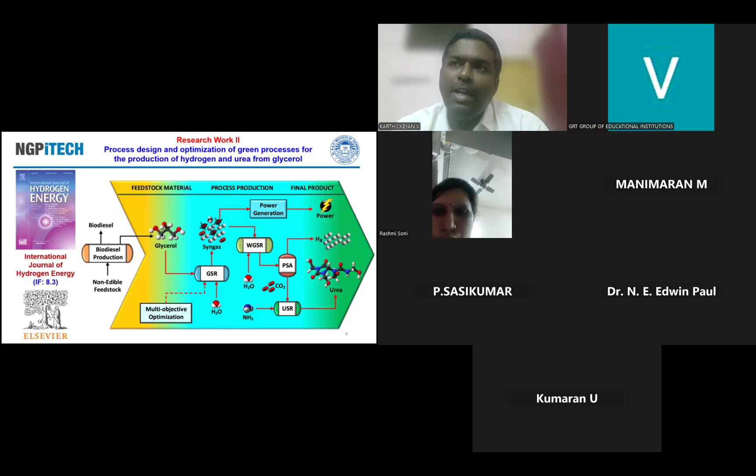In the case of biodiesel, that can be taken for direct application in engines. But glycerol is purely considered a waste material, or it consists of a high amount of fatty content that can be considered for soap manufacturing. This research work gives information about how that waste can be converted into hydrogen.

In this case, we consider the glycerol raw material and do the glycerol steam reformation over here. We consider the water in this GSR and produce the syngas, but the syngas is considered a raw syngas which cannot be in purified form.

For the purification process, we are considering the water gas shift reactor. If we consider this, we can separate the hydrogen and carbon dioxide. Then, considering PSA, which represents pressure swing adsorption method, we can extract the purest form of hydrogen, and the remaining is considered a combination of urea content source. So we consider the urea synthesis process and produce the urea over here.

The syngas can be taken for power generation and we are able to create energy from this method. So in this case, glycerol can be converted into different forms, but in the research we considered different types of scenario-based analysis, life cycle assessments and techno-economic analysis to select which scenario is best for real-time application. This research work is published in the International Journal of Hydrogen Energy.

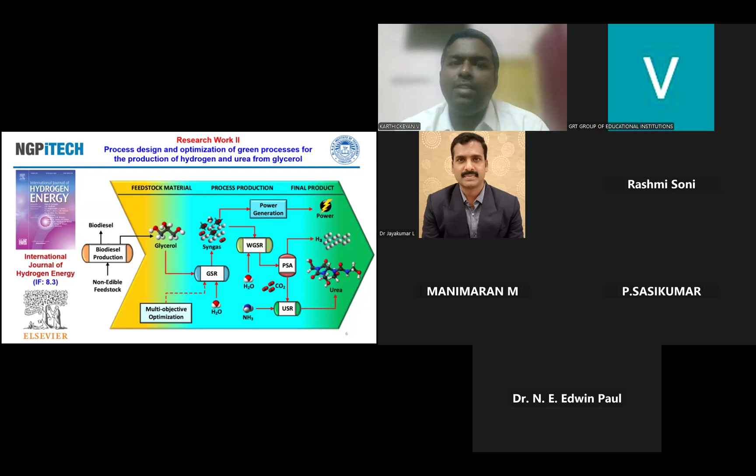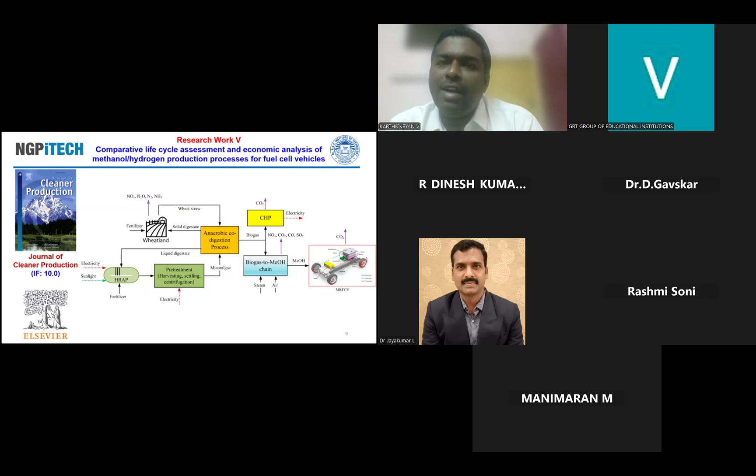Based on this, which approach is prominent for a fuel cell vehicle to get the maximum amount of hydrogen for its utilization is explored in this research work, published in the Journal of Cleaner Production. These 5 works give an outline for this presentation: how hydrogen can be produced, and how it can be implemented for engine, fuel cell, or combined heat and power applications. This gives an in-depth outline of the entire presentation.

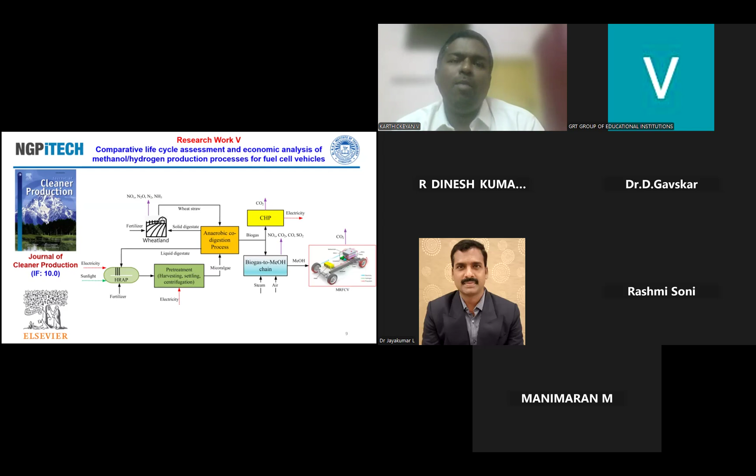First we will discuss the background of hydrogen, that is blue, green and gray hydrogen. The basis of why we require hydrogen is the depletion of fossil fuel as a major factor. Another important parameter is the increase in fuel cost. Another is the greenhouse gas effect, meaning environmental emission plays a vital role, which pollutes the environment and degrades natural resources.

In general, carbon emission for energy is nearly 73.2%. For producing energy, we give carbon emission of nearly 100, with only 26 or 27 percent of energy extraction. We are giving 72 to 73 percent of energy to the environment. If it increases, like how our capital Delhi faces, other states and districts may also face a similar condition. So this plays a vital role.

In the case of transportation alone, 16.2% of the carbon emission from energy production is considered. But if we go for either electric or hydrogen-based operation, we are able to reduce it to a certain level. Hydrogen is considered an important factor because we have shifted from IC engines to electric. From electric, the next version we can expect is fuel cell vehicles.

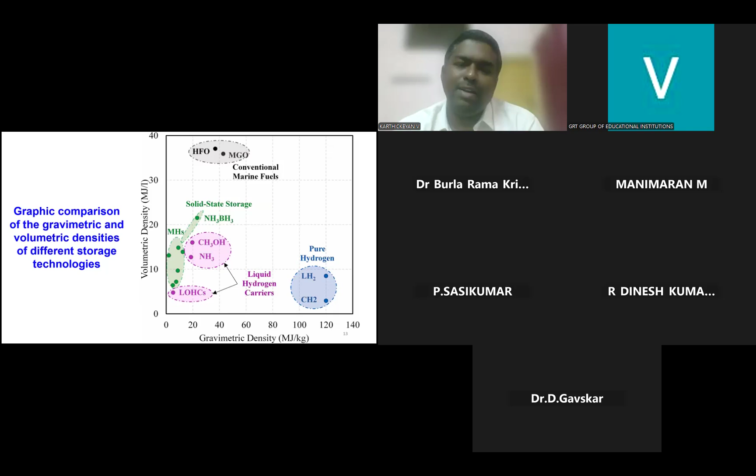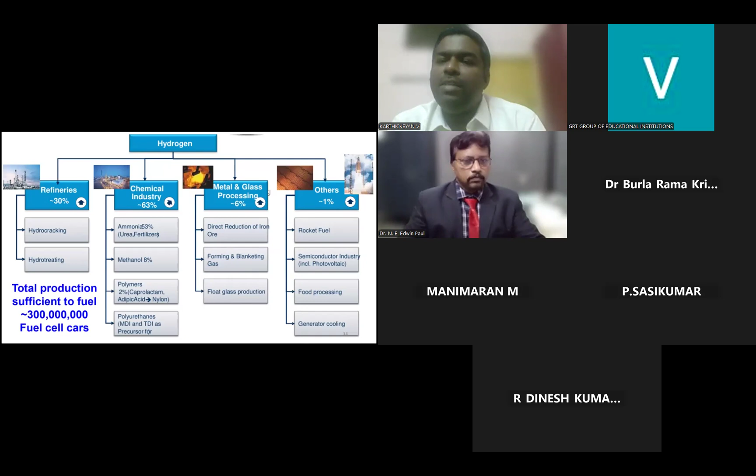In the case of hydrogen, it is used 30% in refineries, 63% in chemical industries, 6% in metal and glass processing, and 1% in other conditions. So overall, the requirement of hydrogen is very high. The production methods are available. The only deficiency is with storing and transportation.

In the case of production methods, I wish to give an overview of the processes available for production, then storage and transportation. Hydrogen can be produced from starch and sugar crops as a source, or water by means of electrolysis, or glycerol by water steam reforming. As I mentioned earlier, natural gas is considered an important source for hydrogen production.

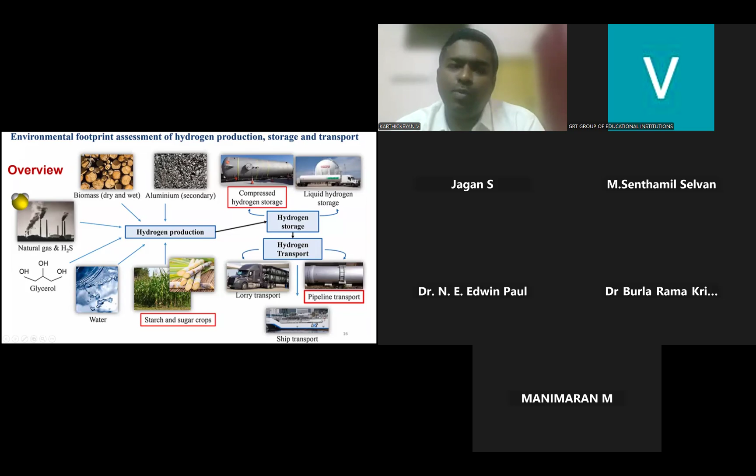Similarly, if we go for green hydrogen, biomass is considered an important source, and when we consider waste material like aluminum or iron ore, after extraction or recycling, we are able to generate hydrogen and also produce power from these sources.

In the case of storage, we have two different types. One is compressed hydrogen storage, by means of air as a medium, and the other is liquid hydrogen storage. In the case of transportation, it can be transferred by pipe, ship, as well as truck transportation.

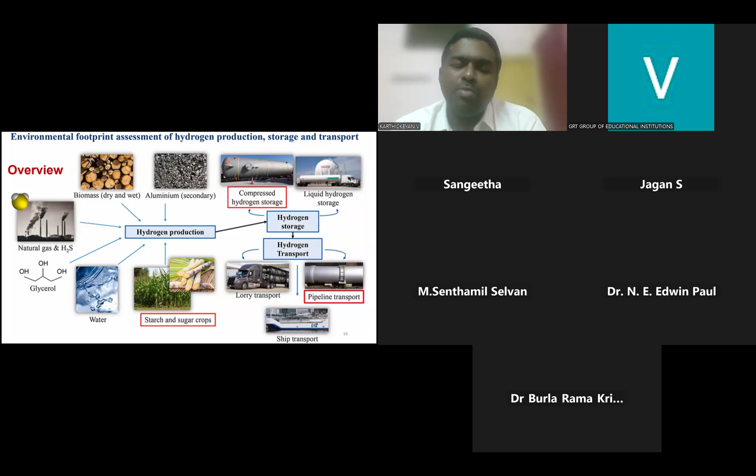This image gives clear information about the current as well as upcoming hydrogen production technologies available in the world, from T1 to T11, so it starts here and ends here. This gives the entire information about the current methods used to produce hydrogen and the technologies.

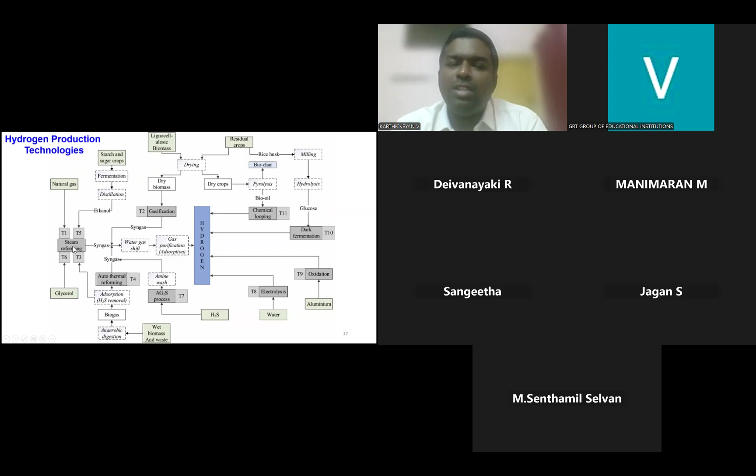The first one, natural gas, is considered technology one. By steam reforming, we are able to produce hydrogen. Similarly, glycerol steam reforming produces hydrogen. Technology 3 is wet biomass: we can make biogas and use the steam reforming method to produce hydrogen.

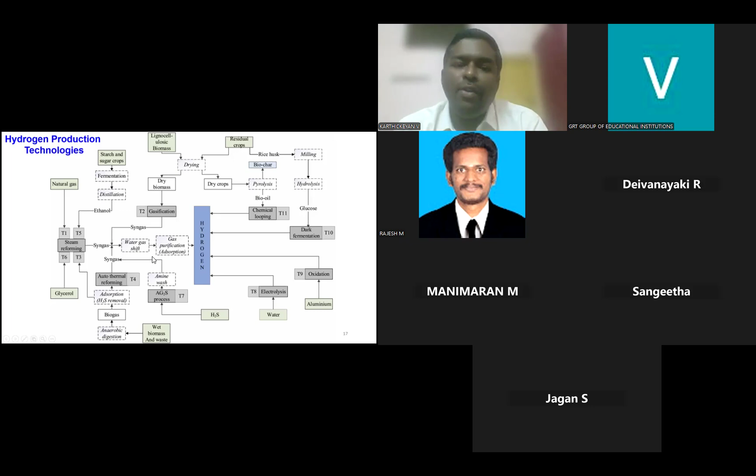If you take the case of starch and sugar crops, we can do fermentation, then distillation, then ethanol. This ethanol can be steam reformed and we are able to produce hydrogen. If you take the case of biomass drying and gasification, as I have already told, like updraft gasification, downdraft gasification, cross draft gasification, or bubbling bed, we are able to produce the syngas. That syngas can be further purified and we are able to produce hydrogen.

If you take the case of residual crops, we can do that by pyrolysis, and by chemical looping we are able to produce hydrogen. Similarly, if you take water, by electrolysis we are able to produce it. Similarly, if you take residual crop and do dark fermentation, we are able to produce hydrogen. Similarly, from aluminum we are able to produce hydrogen. This figure gives clear information that nearly 11 different technologies are available in the current scenario to produce hydrogen.

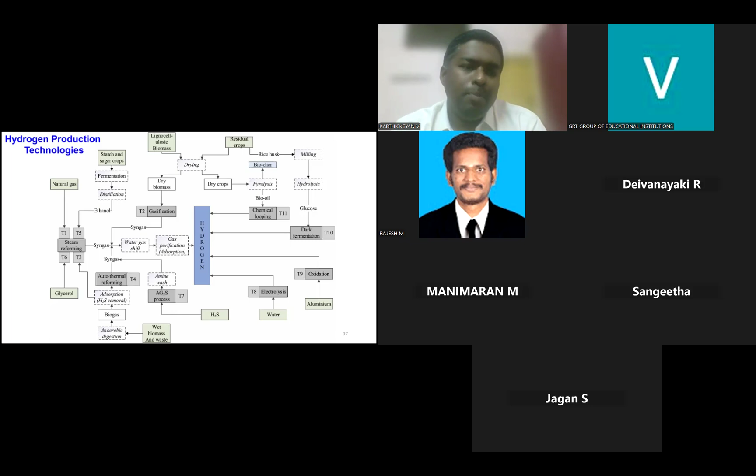Next, we are going to explore the technologies available to produce hydrogen in an in-depth way. The first one we are going to deal with is steam methane reforming of natural gas. If we extract the fossil-based natural gas, we are able to do hydrogenation and steam reforming. Steam reforming is nothing but natural gas as fuel, admitting steam to the system and producing the syngas. Syngas is the combination of hydrogen, carbon dioxide, carbon monoxide, and methane, and by means of WGS, that is water gas shift, as well as PSA, the pressure swing adsorption method, we are able to produce hydrogen.

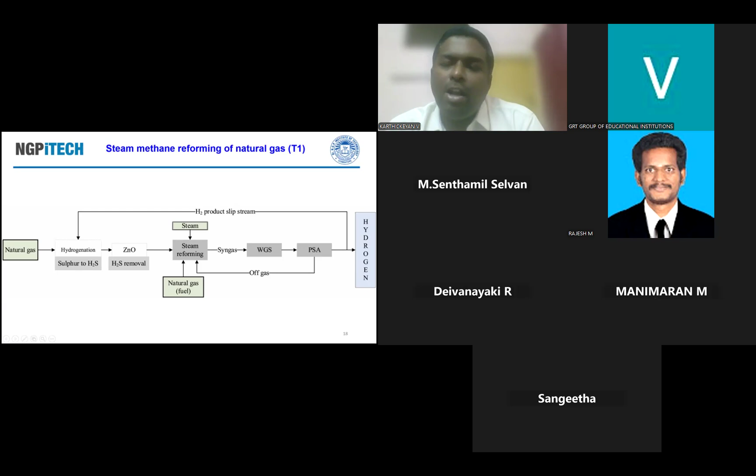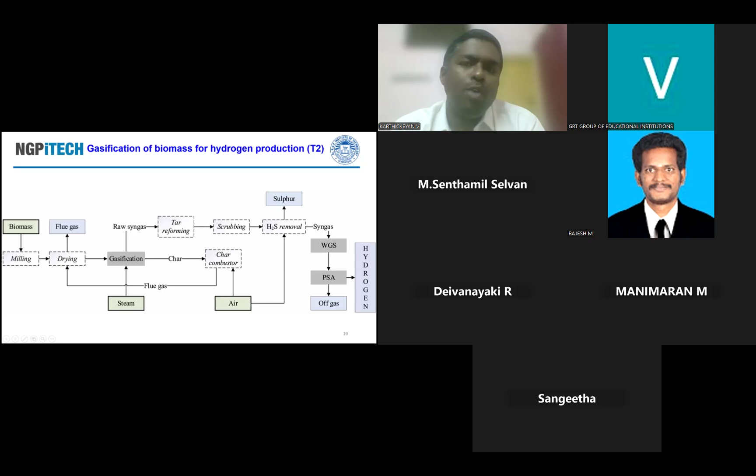Then the second one is the gasification process of biomass for hydrogen production. If we consider a biomass, maybe a woody biomass or a crop based biomass, when we do drying and the gasification process, we are able to get syngas. This syngas, after cleaning, scrubbing, and filtration, gives a quality syngas. Then by means of WGS, that is water gas shift, as well as pressure swing adsorption, we are able to produce hydrogen. The off gas represents other gases available in the syngas like CO, CO2, and methane. By the pressure swing adsorption method, we are able to produce 99.9% purest form of hydrogen.

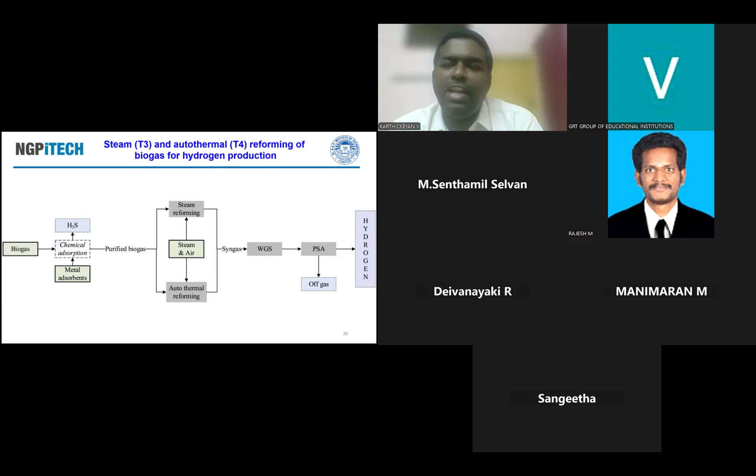Then steam and autothermal reforming are considered technology 3 and technology 4 for hydrogen production by means of biogas. When we do the fermentation process or anaerobic digestion process, we are able to extract the biogas. That biogas, when we go for the purification process by applying steam reforming as well as autothermal reforming, we are able to produce the syngas. This syngas, by means of water gas shift reaction as well as PSA, is used to produce the hydrogen.

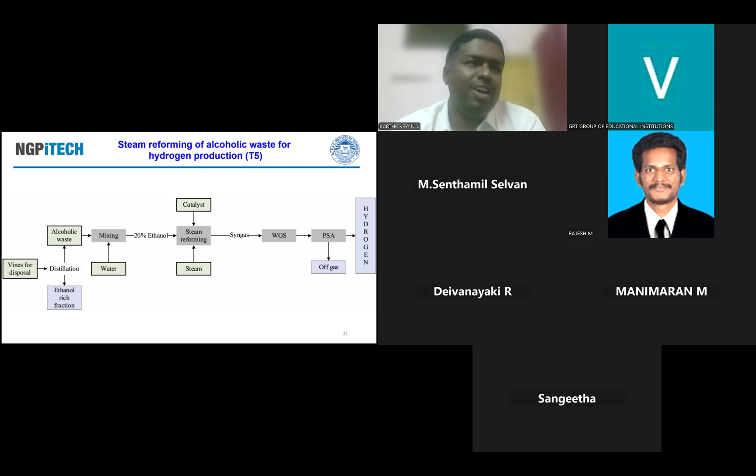Then, if you take the case of alcoholic waste for hydrogen production, like beverages or wine manufacturing, we will get a large amount of waste from the industry. That waste will consist of a large amount of ethanol. This ethanolic waste can be converted into hydrogen. When we go for the steam reforming method with 20% ethanol in the material obtained from the beverage waste, by means of catalyst and steam introduction, we are able to produce the syngas at very high temperature. This syngas is further purified and separated by means of WGS and pressure swing adsorption, and we are able to produce hydrogen.

Then the glycerol steam reforming process for hydrogen production considers oil based feedstock, like jatropha, rapeseed, neem oil, or any type of non-edible oil. By the transesterification process, we are able to separate biodiesel and glycerol. The biodiesel, by means of washing, can be improved in quality and taken to the market directly. But glycerol is considered to be a waste product. This waste product, by means of steam reforming with steam introduction, is used to produce the syngas. This syngas is taken for water gas shift reaction and pressure swing adsorption, and we are able to produce hydrogen.

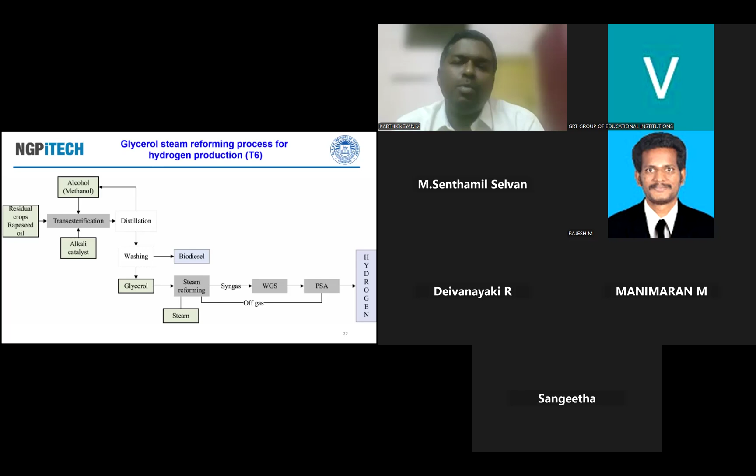PSA. So if you take the entire 7 technologies, we can find two processes or conditions important to separate, purify, and take the hydrogen from the combination of different gases like in a syngas. The two major parts are WGS and PSA. Next, we are going to discuss what WGS is, how it looks, and how it processes, as well as how PSA looks and how we do the process.

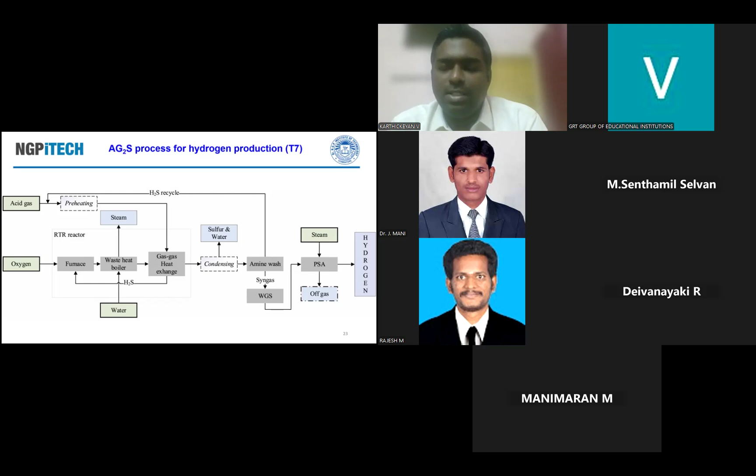So first, we will see about WGS, that is the water gas shift reactor. This water gas shift reactor is nothing but a reactor which consists of a catalyst which can operate with a pressure of 1 to 6 megapascal and a temperature of 180 to 250 degrees Celsius, and it can produce, or extract or separate hydrogen from this. It has some amount of other gases too. By means of PSA, we can improve it.

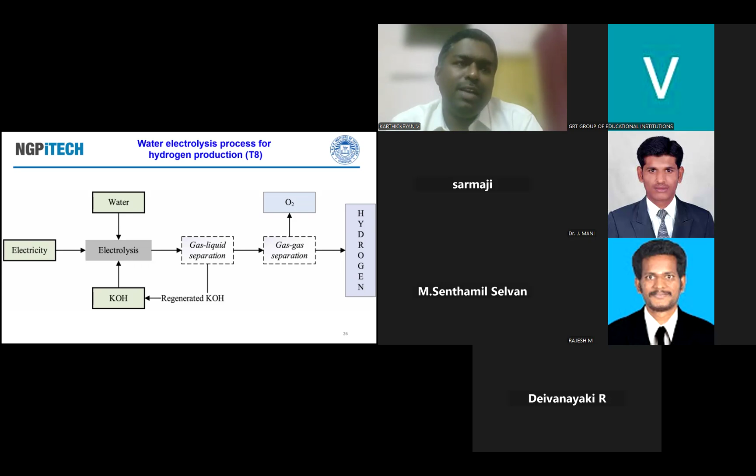When we go for large scale application, the purest form of hydrogen production depends on the gas-liquid separation and gas-gas separation. The gas-liquid separation separates the KOH and takes the gas to the next level. Then in gas-gas separation, some amount of oxygen is removed and the purest form of hydrogen is taken by means of this process. This is called a water electrolysis process.

Then followed by oxidation of aluminum. This is in case of real-time industrial application where aluminum is considered to be a raw material. With this aluminum, when we go for the oxidation process, that is combustion, it can produce a high amount of energy-based steam that is allowed to the steam turbine where we can extract the energy. Then the low pressure heat is taken for the hydrogen production. This is considered to be the oxidation-based aluminum to produce the hydrogen.

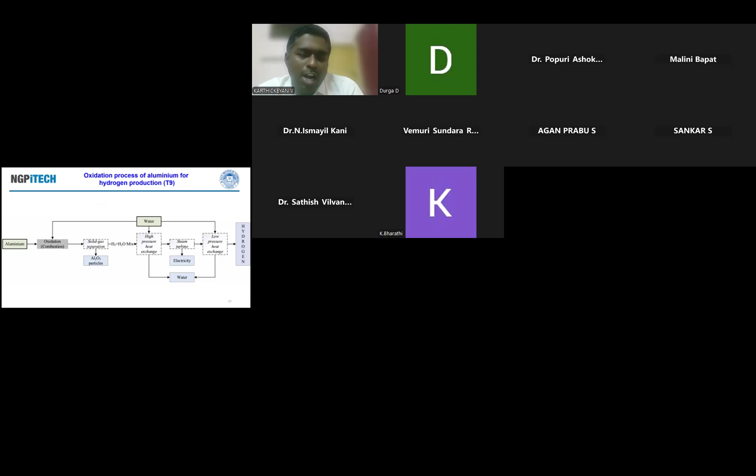Then, if we take the case of the dark fermentation method, it is also currently available in large scale application. If we take materials like rice husk or wheat husk, after removing the source from that, the outer layer is considered to be a waste. That waste is taken for milling, then hydrolysis process, then filtration. From filtration, we go for saccharification process and dark fermentation.

In the dark fermentation process, we consider wastewater from the beverage industries, which has some amount of ethanol as well as some alcoholic material, which enhances the process of dark fermentation. By means of this, we can extract the purest form of hydrogen, and it also has some amount of volatile fatty acid as well as CO2. This is a real-time application process purely dependent on the biological principle. So dark fermentation is considered to be the biological process to produce hydrogen.

The last one is iron-based chemical looping. Similar to what we discussed earlier in the case of aluminum, a similar approach is used here, and we can extract the hydrogen from this method.

So I hope you get an outline of the 11 technologies which are currently available in the market as well as in the research field to produce hydrogen, either experimentally or by process modeling, or by considering the carbon credit, the techno-economic point, life cycle assessment or simulation. All this is possible with these 11 technologies, and these 11 technologies are considered to be the prominent ones for producing hydrogen in real-time conditions.